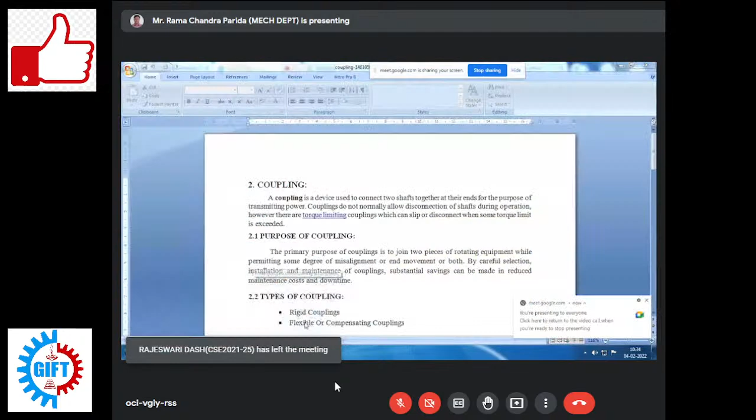We are in the last part of this module 3, so we will discuss that one, coupling. Just wait, I come with that slide, then I will share the screen. Just wait, I am coming. Coupling. Okay. Okay, so slide is visible? Check it. Yes, sir.

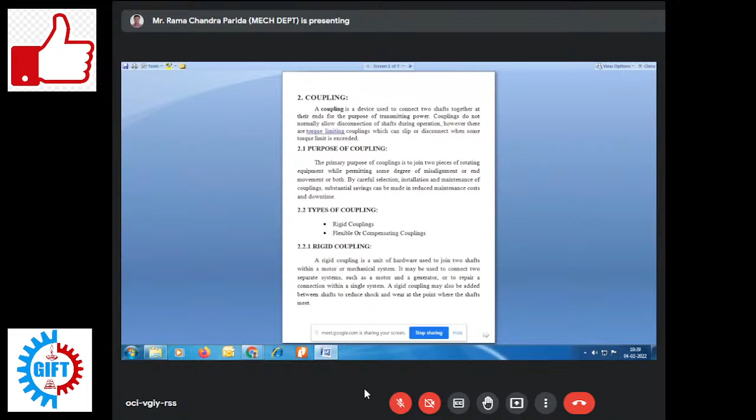A rigid coupling may also be added between shafts to reduce shock and wear at the point where the shafts meet. Here you can see how it looks, how that coupling is made. Flexible couplings are used to transmit torque from one shaft to another when two shafts are slightly misaligned. Rigid coupling connects two shafts when there is almost perfect alignment, but if slight misalignment is there, it is better to prefer flexible coupling over rigid one. Flexible coupling can accommodate varying degree of misalignment up to 3 degree maximum.

Okay, and in addition, they can also be used for vibration damping or noise reduction. Suppose during transmission of motion, noise and vibration is produced. Then it is better here if you use a flexible coupling; it can adjust that.

So you can see this is the figure of your coupling. Your hub is one part, and here the second one is a hub. There is a pipe which is inserted; that middle one is called your coupling. It is tightened through bolts, nuts, and washers. So these are the things. The aim of the flexible coupling is to transfer motion between shafts on the same axis while accounting for possible misalignment.

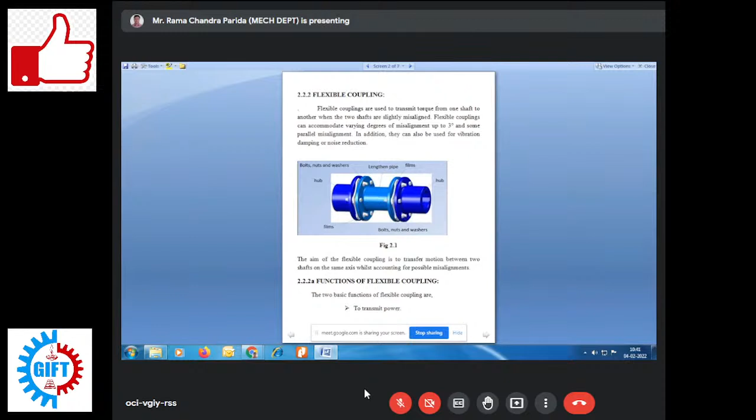So here the basic function of coupling is to transmit power. That is the first one mentioned. And the second one is to accommodate misalignment. So these are the two main objectives of coupling: to transmit motion and to accommodate misalignment. Then come to the types of flexible coupling.

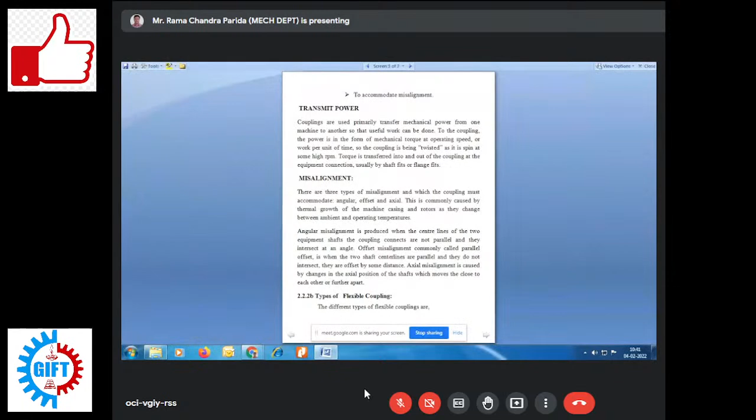Here: flange or pin bush coupling, gear tooth coupling, Bibbly coupling, tire coupling, elastomeric coupling. These are the different types of coupling available. Oldham's coupling I already showed in the last video. Universal coupling or Hooke's coupling I already showed you, where the propeller shaft is connected with the gear transmission box. Bellows coupling, and flexible couplings are categorized as one of four types: mechanically flexible, elastomeric flexible, flexible element, and miscellaneous. So these are the various types of coupling.

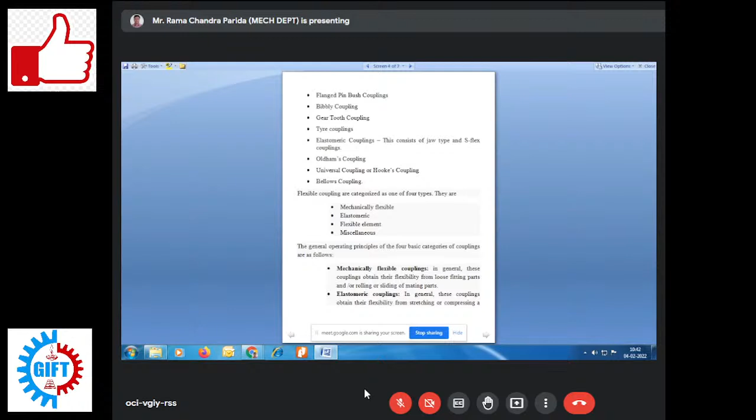So you can see there is a beam coupling. A beam coupling is also known as a helical coupling. It is one type of flexible coupling for transmitting torque between two shafts while allowing for angular misalignment. So this is the diagram of your beam coupling.

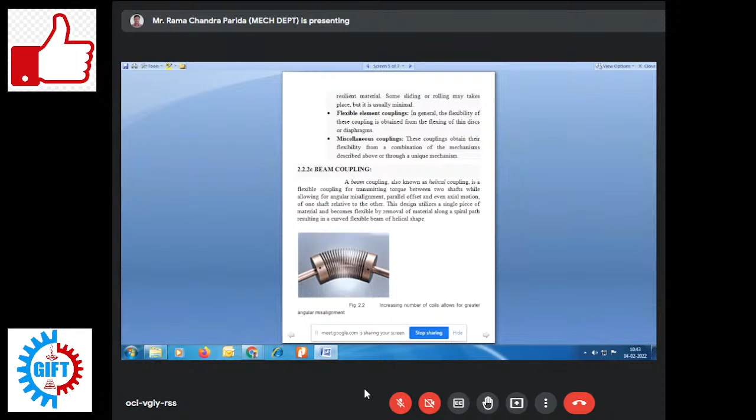You can see this is the gear coupling. Gear coupling is a mechanical device for transmitting torque between two shafts which are not collinear. Not collinear means not in a common line. It consists of a flexible joint at each shaft. The two joints are connected by a third shaft called the spindle. And each joint consists of a 1:1 gear ratio, which we already learned in the last chapter. That may be an internal or external gear pair.

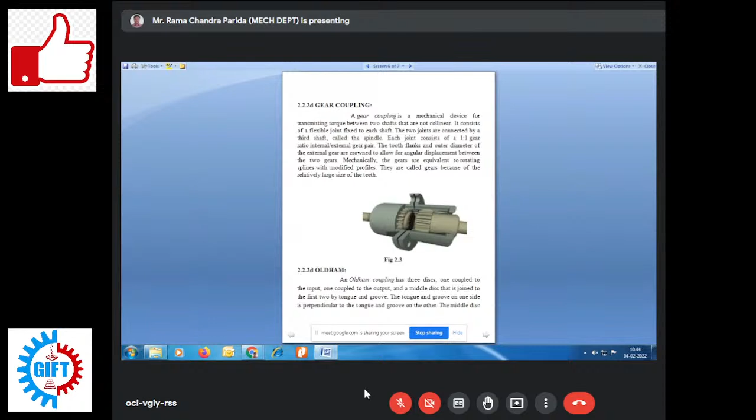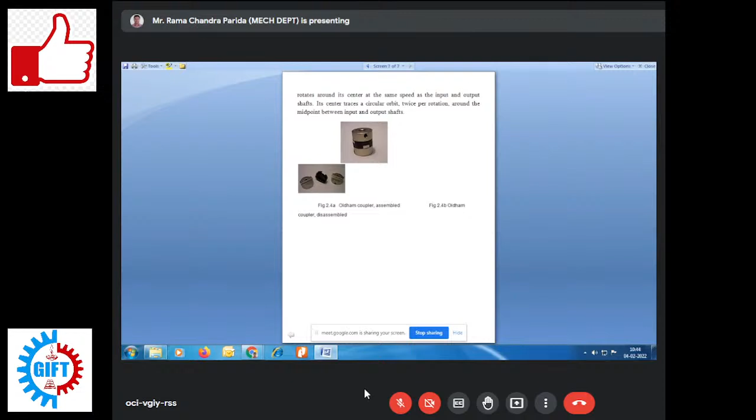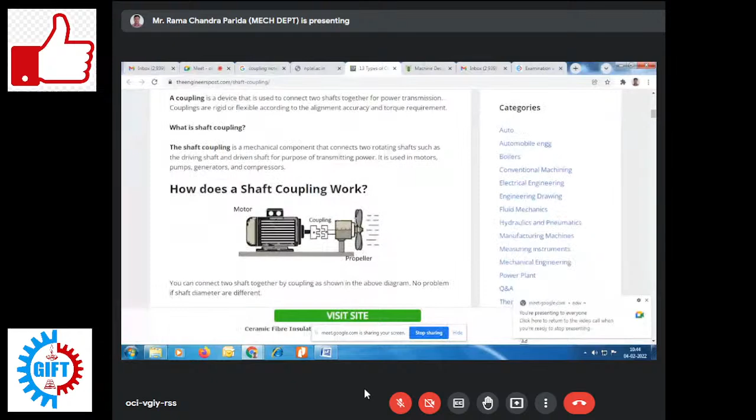Then another one is your Oldham's coupling, already discussed in the previous class. So this much we have to consider from this coupling part. So let's see how that connection takes place. Are you able to see the motor shaft and the propeller fan shaft? One is the fan shaft, another is the motor shaft. Are you able to see it or not? Yes, sir.

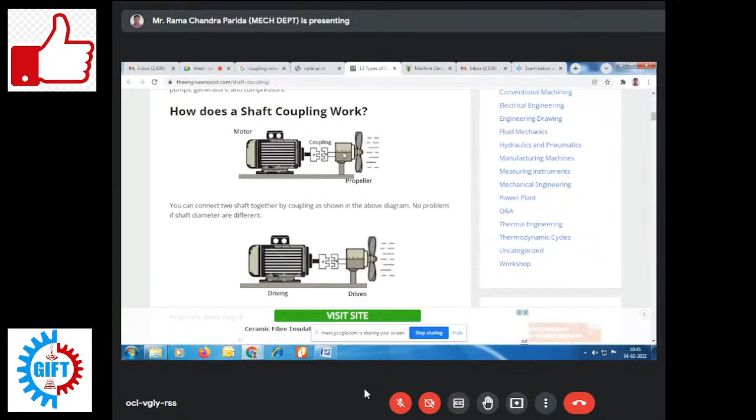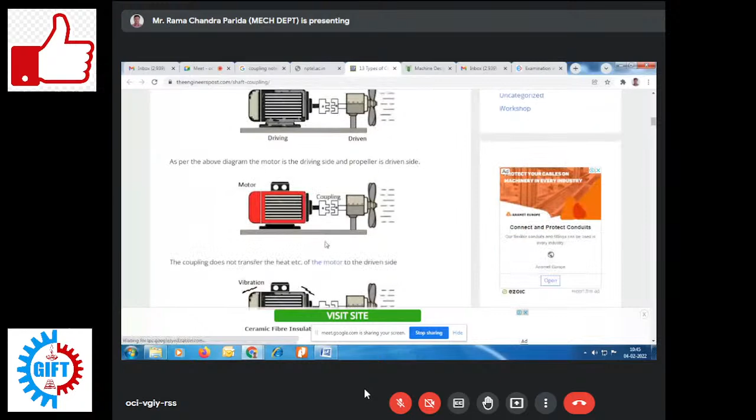So that means one becomes your driving, the other becomes your driven. Similarly, once this coupling occurs, here you will find some vibration. It is shown here that the coupling does not transfer heat of the motor to the driven side.

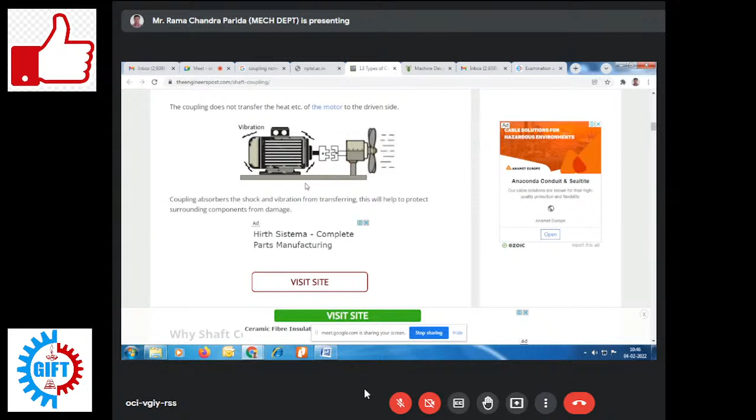So you can see here, this vibration in this motor can easily be absorbed by this coupling. Are you able to see it or not? We learned in the previous slide that coupling absorbs the shock and vibration produced, and here you can see this coupling absorb this vibration, and also this heat is actually transferred to the atmospheric air through the mode of convection.

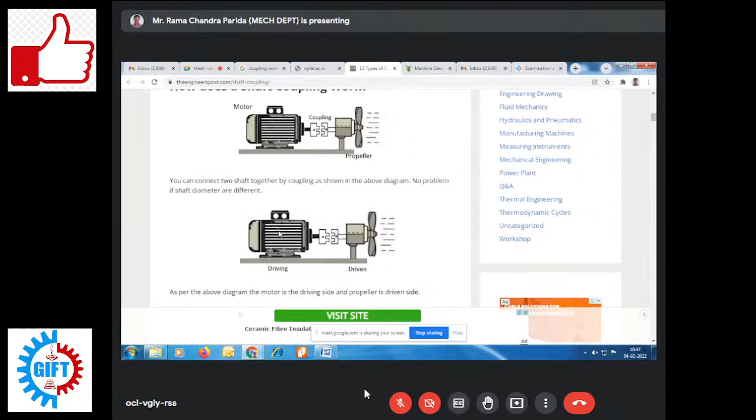The possible types of heat transfer to the surroundings are conduction, convection, radiation, and convection is free convection or forced convection. So here you can consider this is a free convection method by which heat is transferred from this motor. You can also find this type of shape in the motor. I already mentioned in the theory class that these are called fin type structures, and because of this also your heat transfer improves. So once that heat transfer takes place, your system becomes thermally stable.

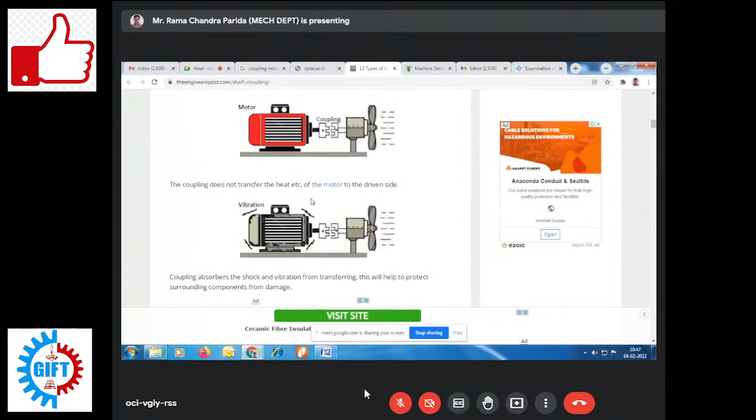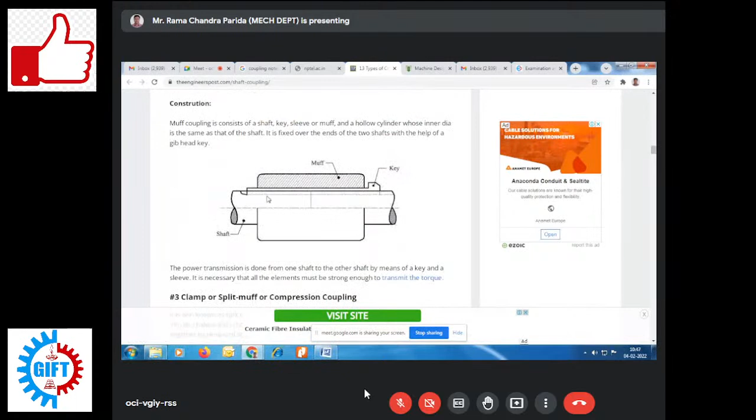Then these types of vibration. So here you can see these are the different types of coupling. If you come to the construction part, you will find this type of thing in a two-dimensional view. The first one is your muff coupling. You can find rigid coupling and flexible coupling. Under flexible we already discussed bush pin type, universal coupling, Oldham's coupling, gear coupling, bellow coupling, jaw coupling, diaphragm coupling. All these come under flexible coupling.

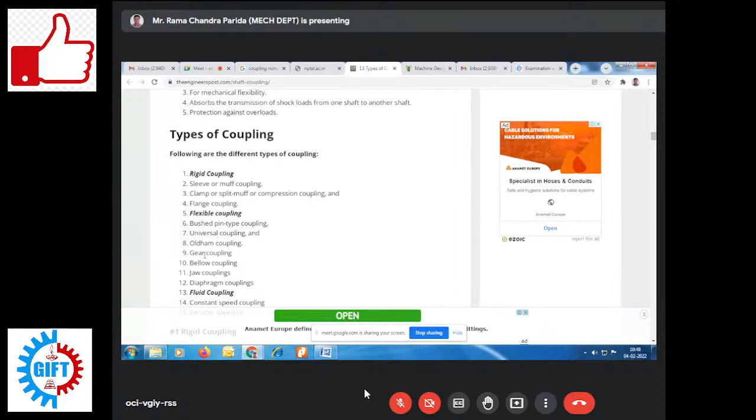These are only suitable for close alignment. Example, your sleeve or muff coupling, split muff coupling, or flange coupling. Flange coupling is one type of rigid coupling, and it connects two shafts which are perfectly aligned. You can see this is the shaft, this is the shaft. By inserting a key, this will form your coupling.

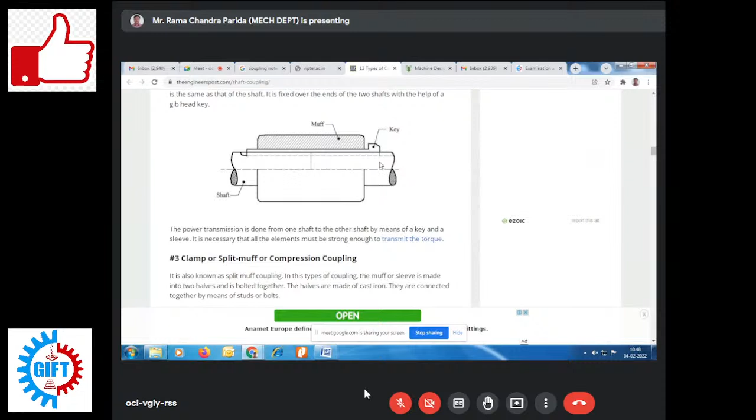Another type of coupling you can see here is the clamp or split muff or compression coupling. Are you able to see that hole on this side or not? Here the shaft will be inserted, from the opposite side the other shaft will be inserted, and this will be tightened. Because of that it will hold the shafts in position. So it is known as a split muff coupling. In this type of coupling the muff or sleeve is made into two halves, and these are bolted together. The halves are made of cast iron.

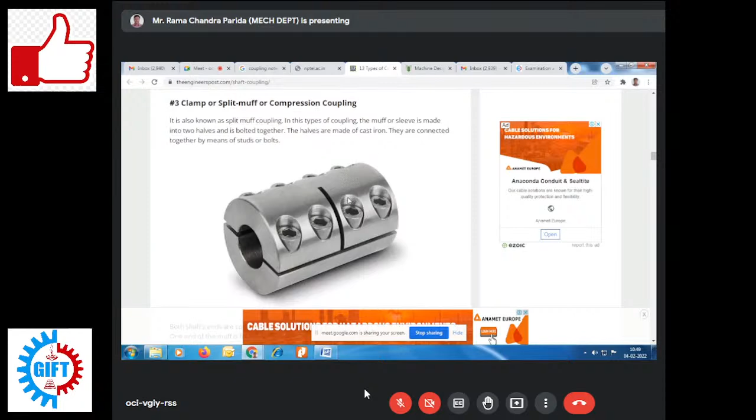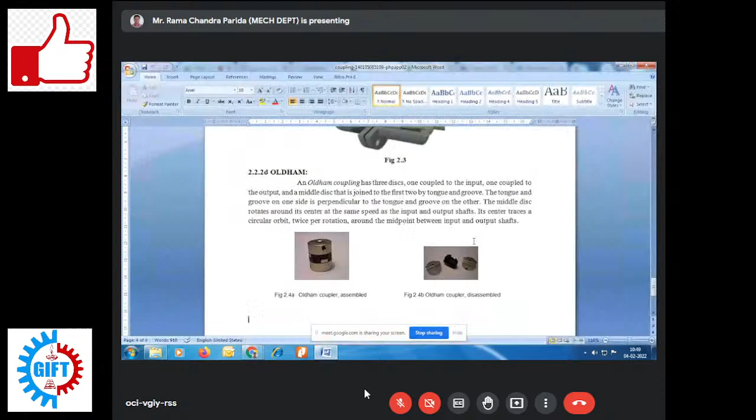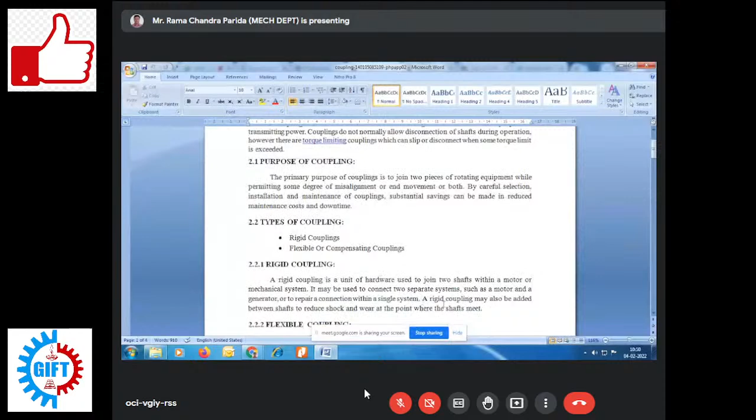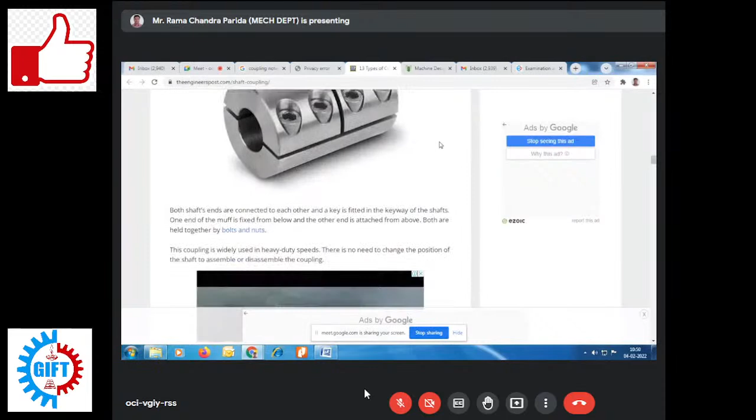You can see this one. This is the type of rigid coupling we are discussing. Under this rigid coupling we are now observing this one. Another one here you can see is the flange coupling. Just wait, I'll come with some good images.

Just wait. Just wait. So now you will be able to see. I think the screen is clearly visible now. Able to see it or not?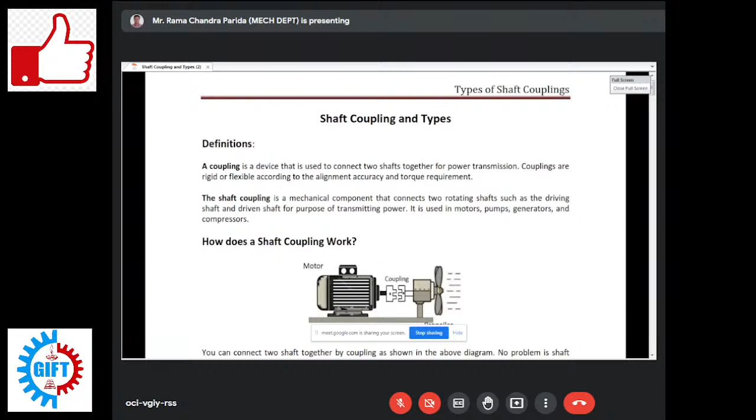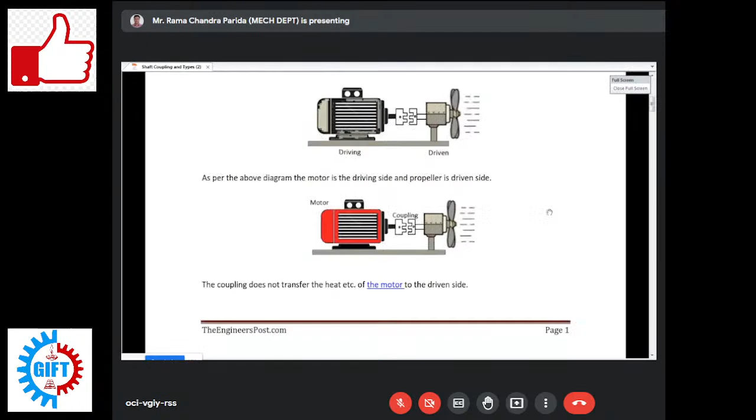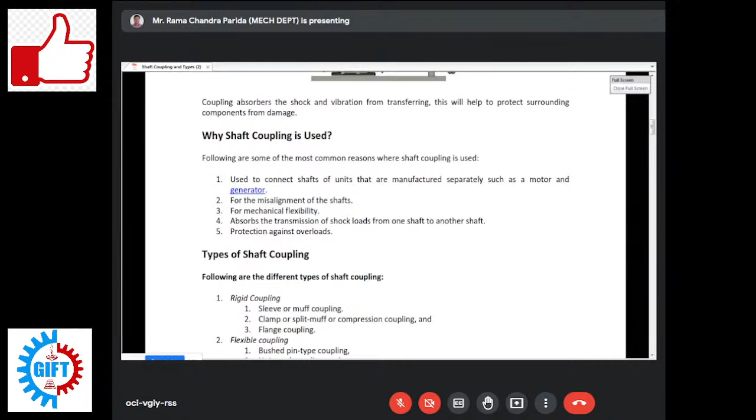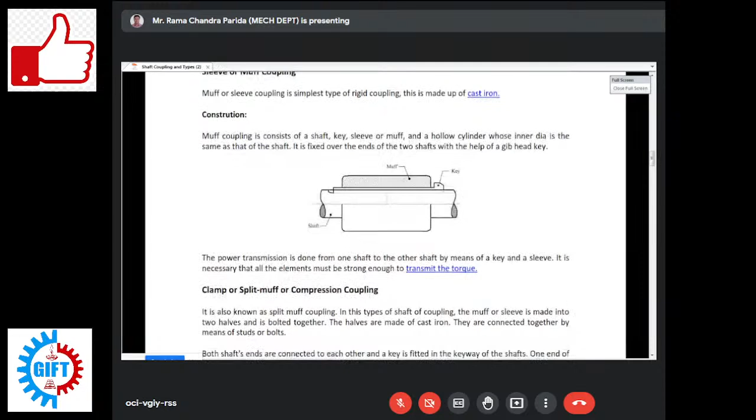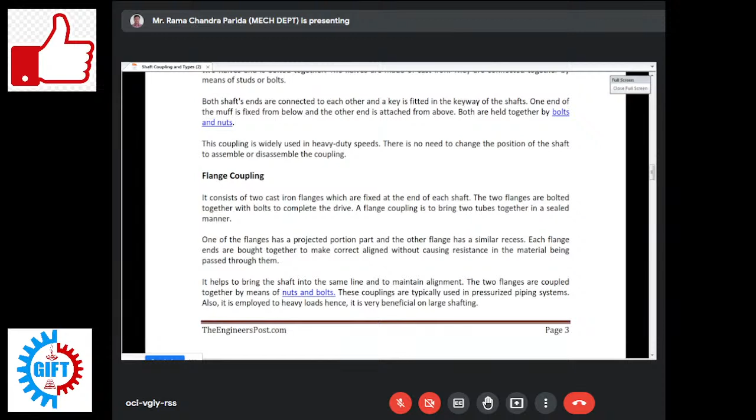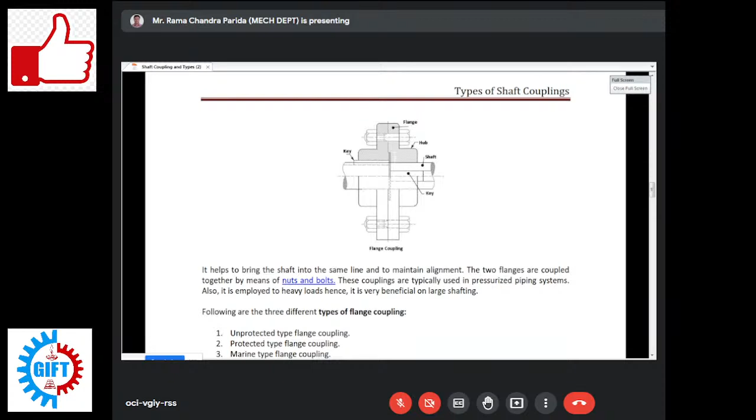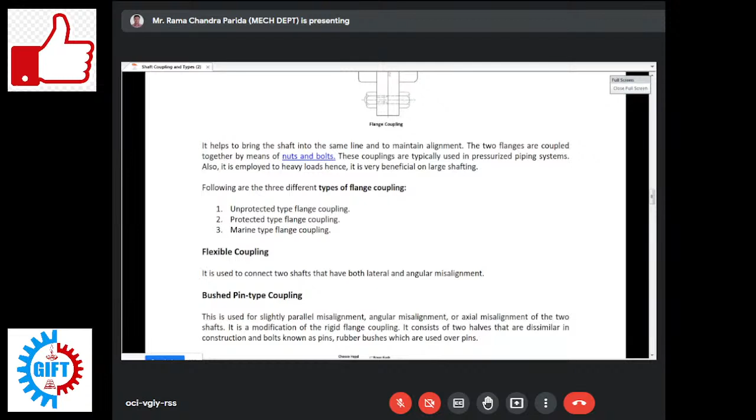Here again, this flange coupling has types: protected type and unprotected type. This sub-classification is not included in your syllabus. You have to only focus on rigid and flexible coupling and the types under that. So flexible coupling: it is used to connect two shafts having both lateral and angular misalignment. You can see flexible as discussed.

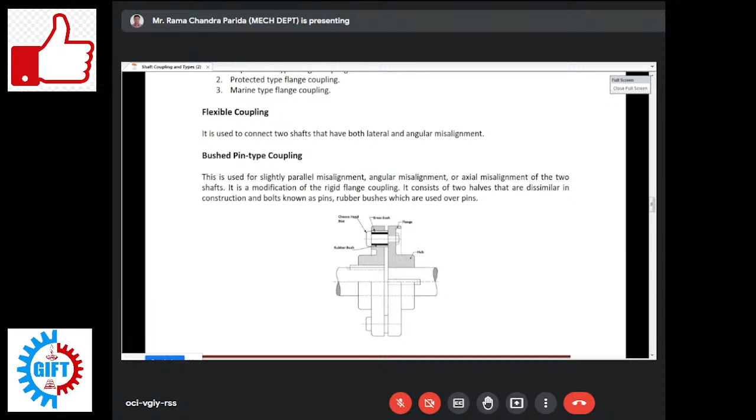So if your alignment between two shafts is perfect, rigid coupling is used, and if there is some lateral or angular misalignment, it can be only lateral, or it can be lateral as well as angular. This type of misalignment can be adjusted through flexible coupling. So bush pin type coupling here, in the same way, both are coupled by means of nuts and bolts.

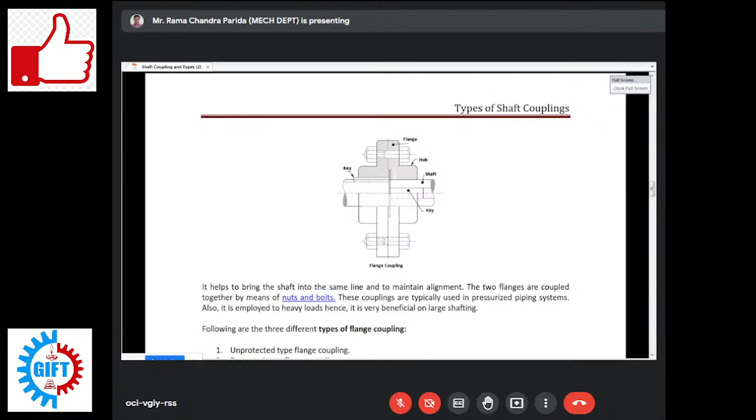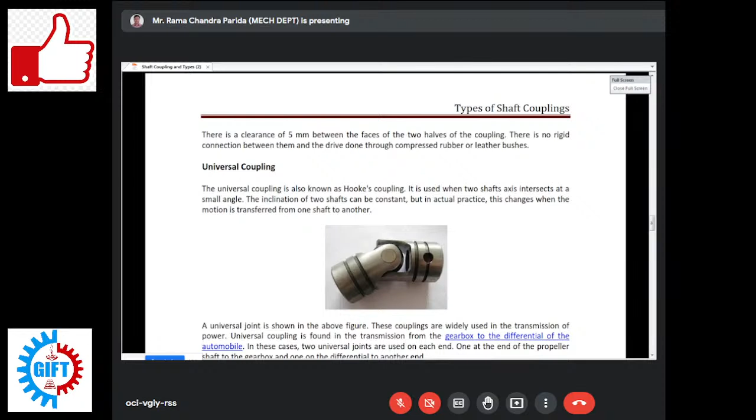Next come to universal coupling, as already you have gone through in the last class video. Universal coupling is also known as Hooke's coupling. It is used to connect two shafts whose axes intersect at a small angle. Suppose two axes are intersecting at a small angle; there we have to introduce the universal coupling. So inclination of two shafts can be constant, but in actual practice, it changes when the motion is transferred from one shaft to another.

So you can see, as discussed earlier, a universal joint as shown in figure. You can find its uses in gearbox to differential, where the gearbox is connected to the differential of the auto vehicle. In these cases, two universal joints are used, one on each end: one at the propeller shaft to the gearbox, and the other at the propeller shaft to the differential. So at either end of your propeller shaft, you will find a universal coupling.

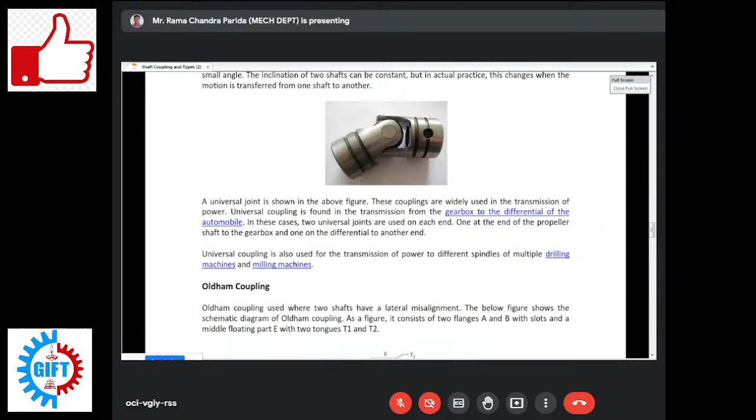And also, in addition to auto vehicles, you can find the uses of universal coupling in multiple drilling machines and milling machines. Next, come to Oldham's coupling. It is used to connect two shafts having a lateral misalignment. You can see from this diagram clearly that one shaft is lying just above the other shaft. Here you can see this axis; there is some lateral misalignment. Lateral misalignment can be adjusted by using Oldham's coupling, and Oldham's coupling is one type of flexible coupling.

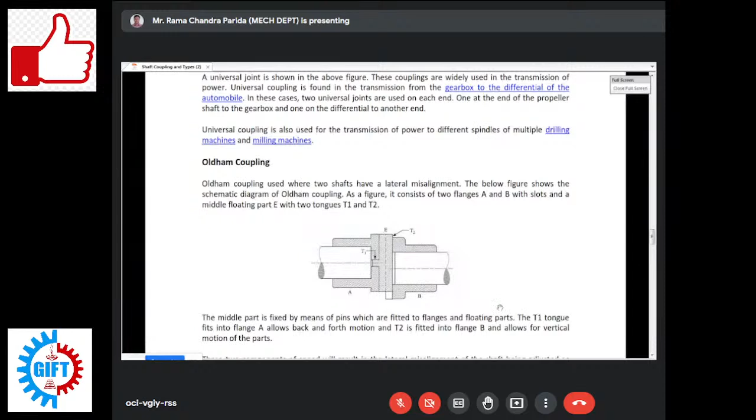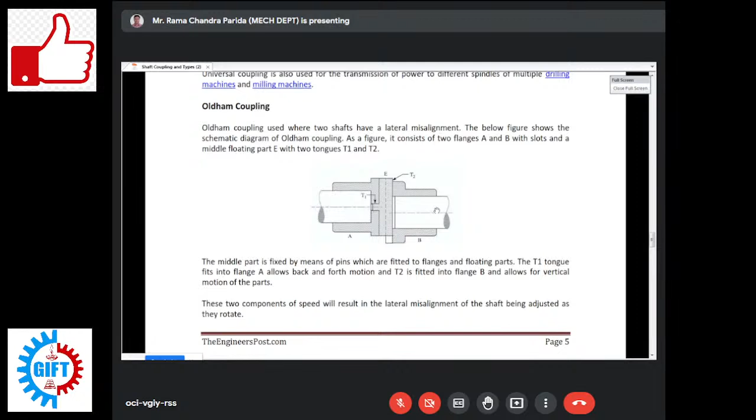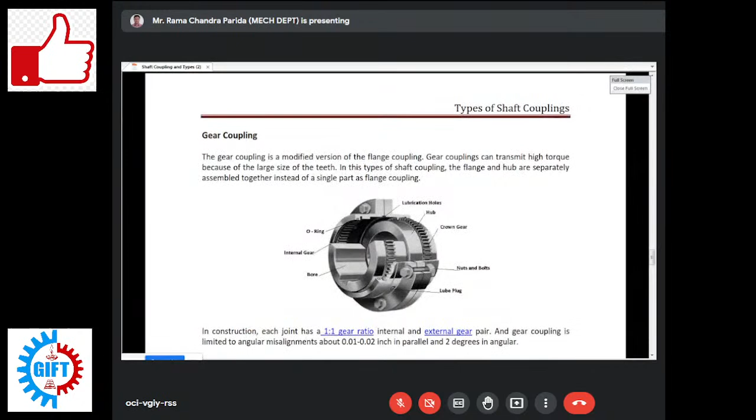As shown in figure, it consists of two flanges A and B with slots and a middle floating part E. The floating part E is able to adjust the lateral misalignment, with the two tongues T1 and T2. The middle part is fixed by means of pins which are fitted to the flanges and floating parts. T1 is fitted to flange A and T2 is fitted to flange B, whereas T1 allows back and forth motion and T2 allows the vertical motion.

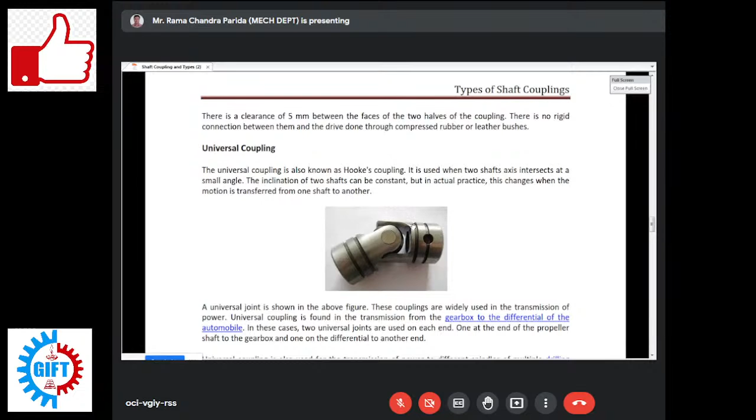Where two shafts intersect with a small angle, you can see that small angular misalignment can be adjusted through this universal coupling.

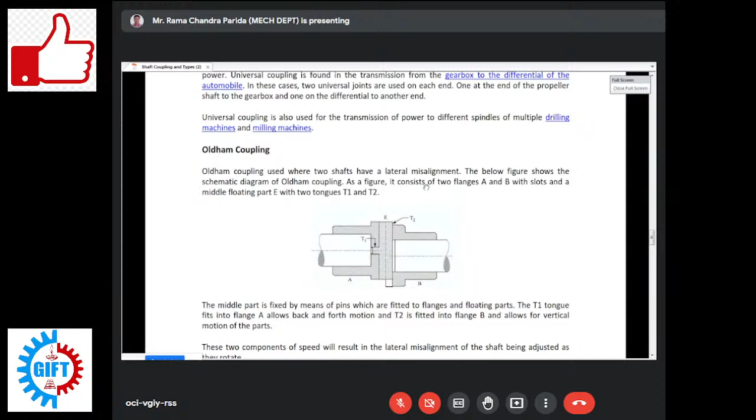But what you observe in case of Oldham's coupling is that it is used to adjust any lateral misalignment present between two shafts. If there is no misalignment, flexible coupling will not come; there you will use your rigid coupling. So once there is lateral misalignment, to connect shafts having lateral misalignment, you have to use Oldham's coupling. It consists of basically two flanges, one A and another B, with some slots.

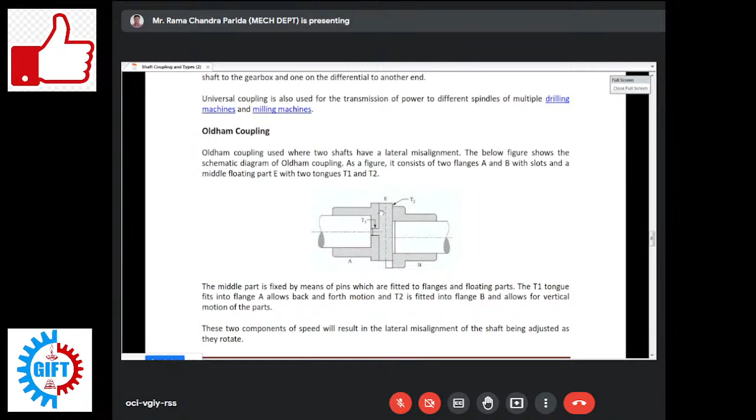A middle floating part E is clearly visible in this diagram with two tongues, T1 and T2. T1 tongue is attached to flange A, whereas T2 tongue is attached to flange B. T1 allows back and forth motion between the two shafts, while T2, attached to flange B, allows vertical motion between the two shafts. Combined, these allow for lateral misalignment.

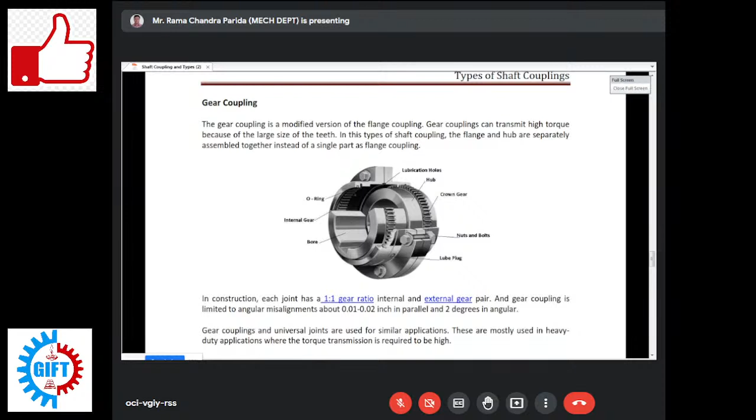So how does it transmit high torque? Because of the large size of the teeth. In this type of shaft coupling, the flange and hubs are separately assembled together instead of a single part. That means what was a single part in flange coupling, here it is separately assembled. You can see in this diagram here, this gear coupling.

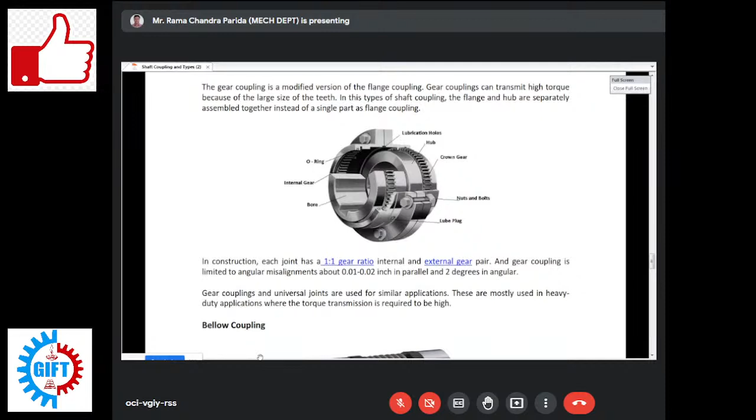It is limited to angular misalignment about 0.01 to 0.02 inch in parallel and 2 degrees in angular. This and universal joint are used in similar applications, but these are mostly used in heavy duty applications where torque transmission is required to be high. So what is the basic difference between this gear coupling and your universal coupling? Your gear coupling is installed whenever there is a requirement of very high torque transmission.

This is the diagram of your bellows coupling. Bellows couplings are flexible couplings with twin coupling ends called hubs. These two ends are called your hubs. These couplings have excellent torsional rigidity to accurately transmit velocity, angular position, and torque.

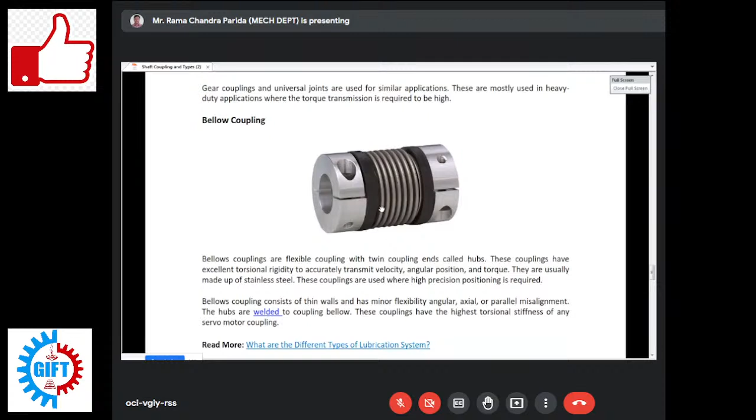Coming to its construction, it looks like shown in this diagram, and it is made up of stainless steel. It consists of a thin wall and has minor flexibility in angular, axial, and parallel misalignment. A bellows type of coupling is one type of your flexible coupling.

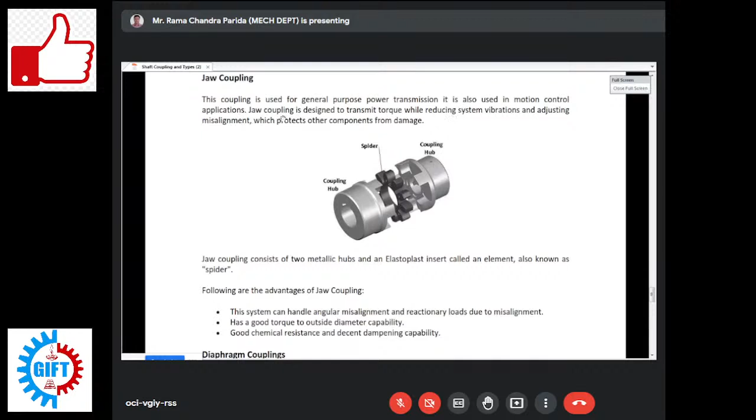Then comes jaw coupling. It is used for general purpose power transmission and also in motion control applications. You can see this diagram. This is the element known as spider, which is used to connect these two jaws.

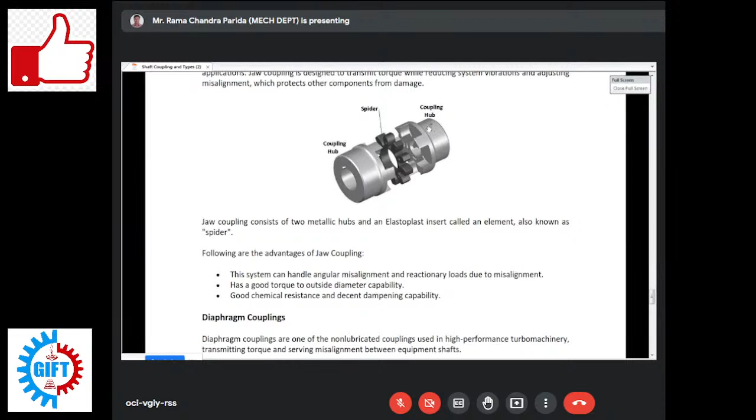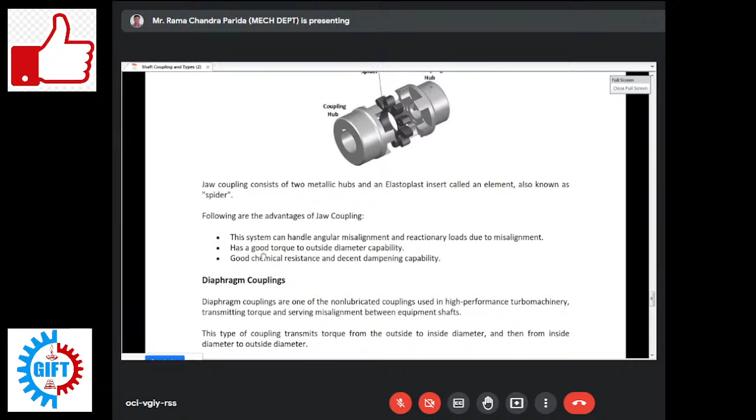What are the advantages of jaw coupling over other types of coupling? It handles angular misalignment, has good torque to outside diameter capability, and good chemical resistance.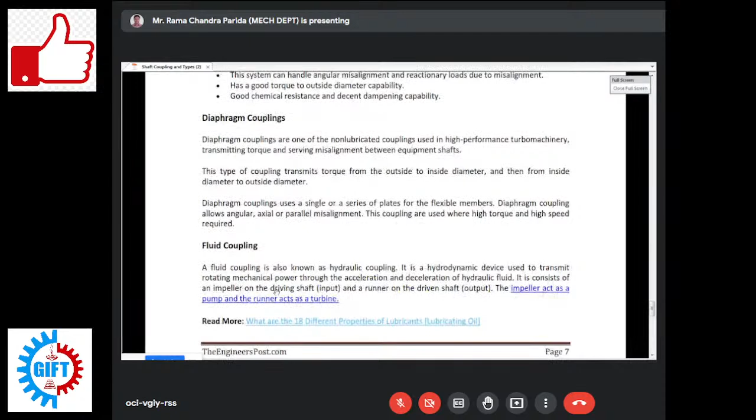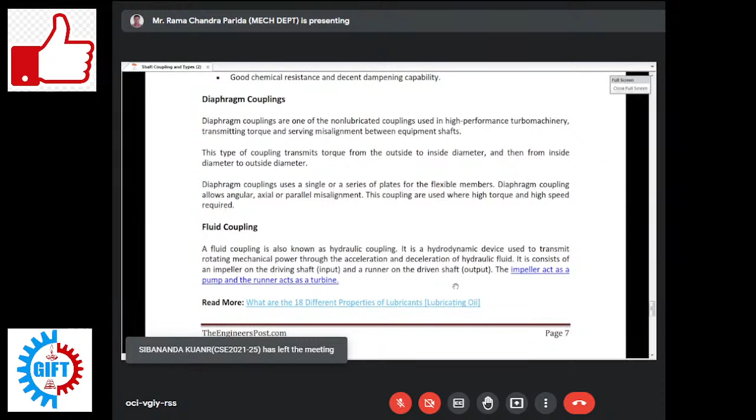Forget about that one. Then you can see this is diaphragm coupling, and otherwise fluid coupling is also there. Remember, one is rigid, another is flexible, and another is fluid coupling. Fluid coupling is also known as hydraulic coupling. It is a hydrodynamic device used to transmit rotating mechanical power through acceleration and deceleration of the hydraulic fluid. It consists of an impeller on the driving shaft and a runner on the driven shaft. Here you can see how it looks.

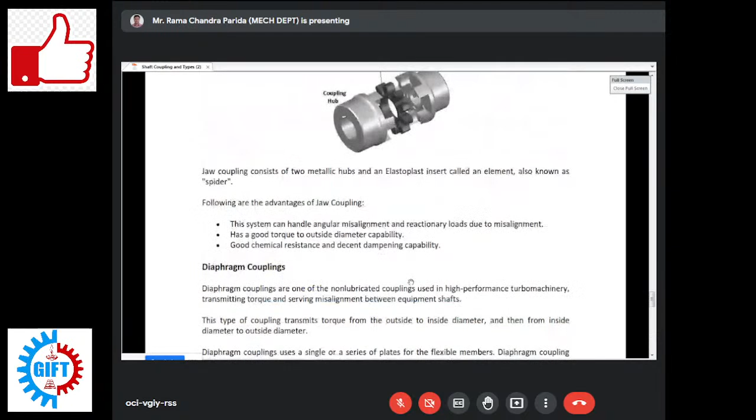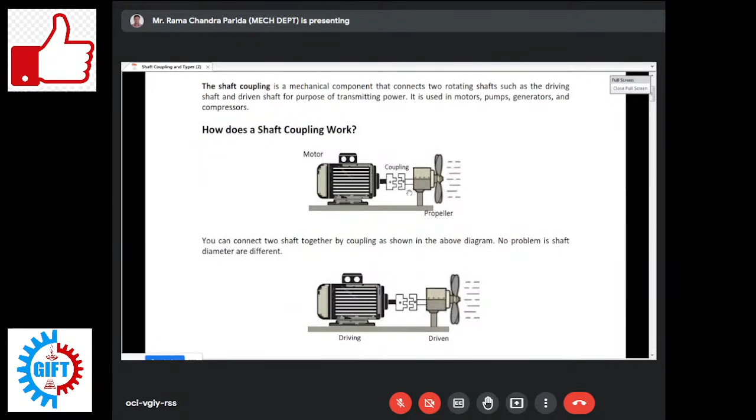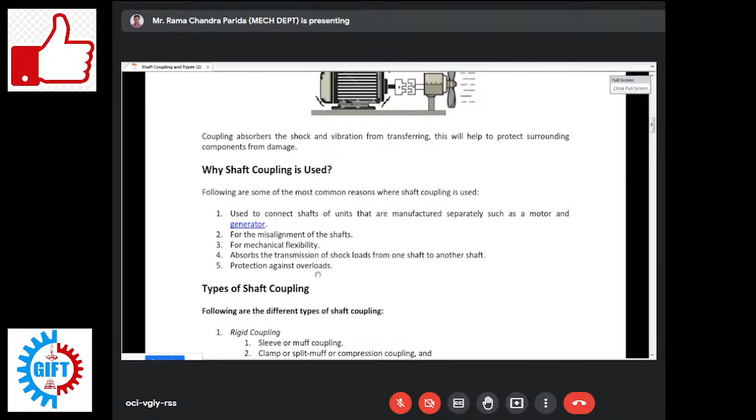This is all about coupling and its types. Here you can see the definition of coupling, how it is connected, how it is used to connect two shafts, why shaft coupling is used, and its uses. I will share this one and the previous class PDF with you for updating your notes.